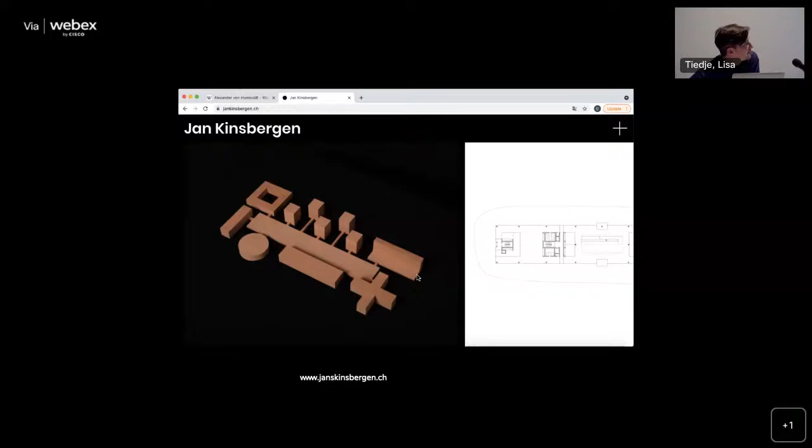It's for a bigger project from Jan Kinsbergen. He won the competition for a campus. These are all buildings within the middle of a big park, and we proposed within that big park for the competition to do an intervention.

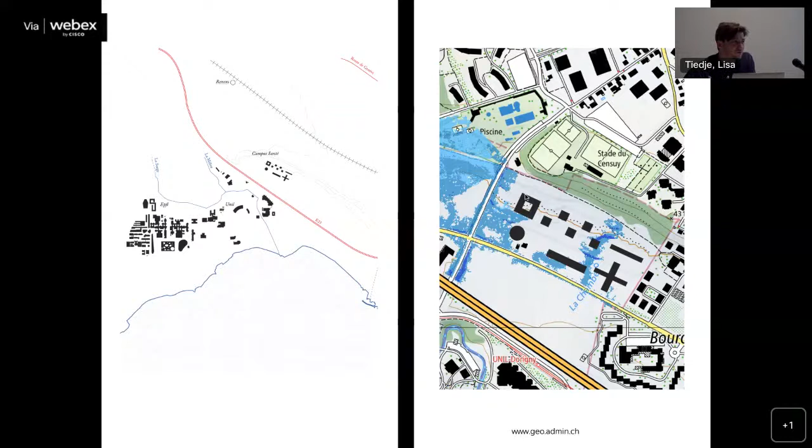When we looked at the site quite fast, it was clear that there was already a lot on the site, although it looks very empty. There was a big problem with water maintenance and rainwater, and what to do with the water in the park, which would only become more difficult once it's constructed and there's more hard surface. At the same time, there was a very strong height difference through the whole site. The pink is the lower part, the green is the upper part, and there's a very strong separation between the two.

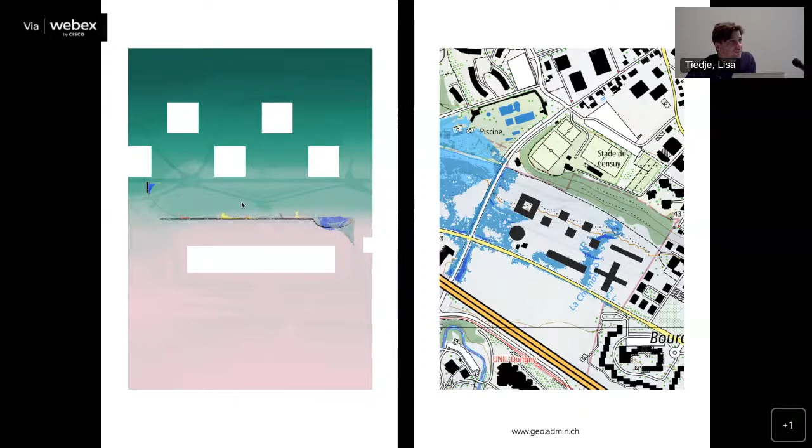So we started to think, can we somehow make a fountain within that park, a place where people can come together, and at the same time create another type of nature on that site. Together with Fabian, he brought this reference of Cranach, the Fountain of Youth, with this idea of how, in a mythical way, water always brought life and also death at the same time—it's dangerous, it brings life, it's necessary, it can be too much—and how this can at the same time become a center around which people can come together.

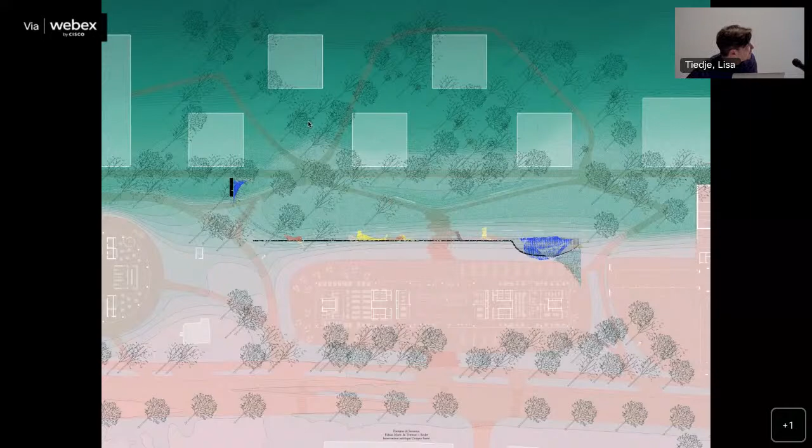Here you see the full plan of the campus. You have the three buildings of Jan Kinsbergen, and on the top, housing that will be built.

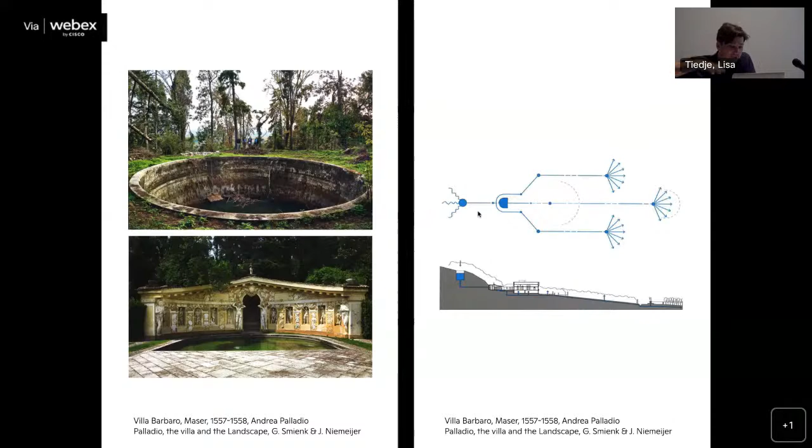When we started to look into the project deeper, we got fascinated with fountains of the Renaissance and other older fountains that look quite aesthetic and classical, and at the same time are integral water systems that recuperate water on the top of the mountain. Here you see Villa Barbaro from Palladio with the big reservoir on top, and then through just gravity the whole thing sinks down and brings water to the fields down, going through the grottos, etc.

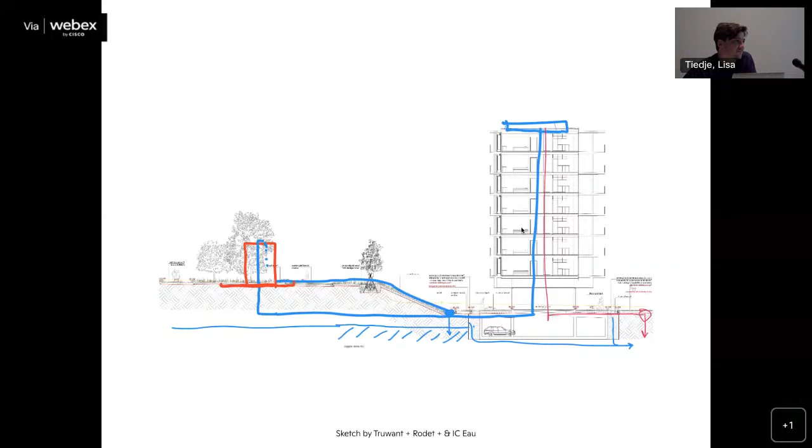So we were thinking, can we do the same today still? Can we link the buildings and the rainwater collected on top of them for our fountain, and create a fountain that is just powered by rainwater? At the same time, how can we create, through the setting of different conditions, different qualities of nature?

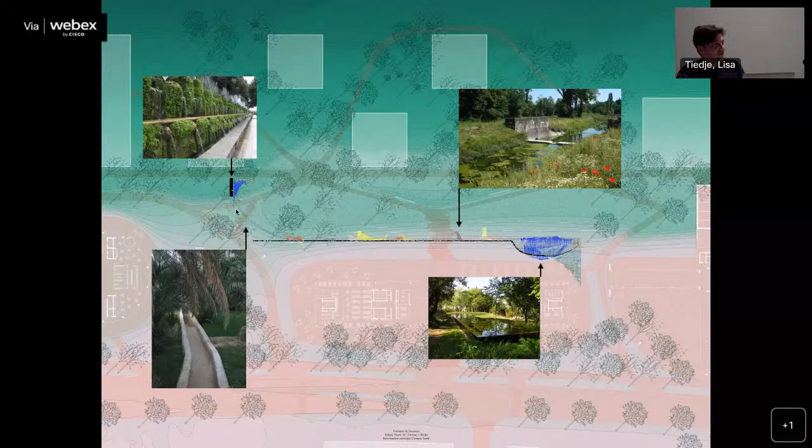For example, in the beginning, water from our reservoir will go really slowly on a very rough concrete surface, so it will start forming mosses. Then it will go faster, like a little channel on a very smooth surface, and nothing will grow there—more of a river situation. Just by deciding the speed of the water and the texture of the concrete or material it moves through, we can create a fountain through which water will infiltrate the soil over a longer period, while creating a new nature on site.

It's not so clear here on the screen, but it's a 120-meter long fountain over which this whole system develops from a really big reservoir on top. There will be a massive reservoir to start with, and then two underground reservoirs to keep the fountain charged with water even on hot days.

To bring that down further to a second project—this kind of uncertainty of how to work with and plan for the future, while trying to read what's already on site. We were selected for the Basel Pavilion competition in Basel for the Architecture Week, where there was a site in Dreispitz, a very industrial area that's going to be developed soon. On the rail tracks, we were asked to work with a catalog of reused materials to build a pavilion out of reused materials.

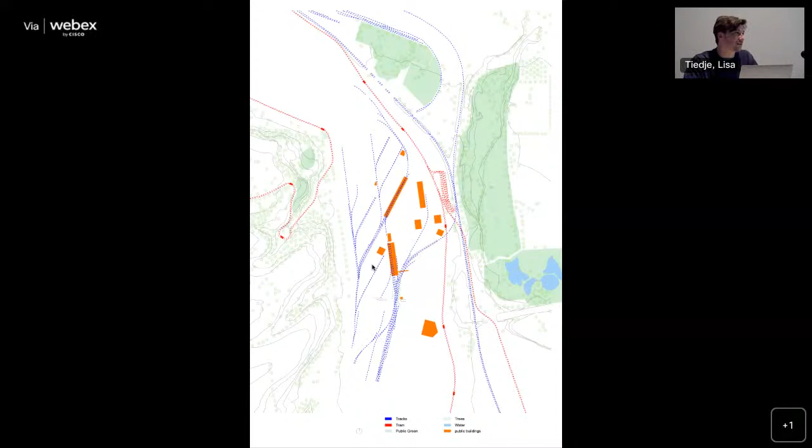This is the situation of Dreispitz. It's like a plateau between Bruderholz, which is a hilly green situation, and the park on the right side. It's a very dry plateau, almost fully covered with asphalt and stone.

And we got this catalog to work with, of all materials, very well prepared by Circular. Every material was measured, how big it was, with a 3D model for it. And then we had to come up with something.

So we started to work with this site, basically seeing what is already on site. You have this beautiful garage building, with VMM engineers on the top, and a little house on the bottom still standing there from the signal house.

And then we started to look at the site in itself, what is still there - these trusses from the rail tracks on which the cables were hung. We also have cables. So we actually expanded our catalog with the site itself and everything we found on it.

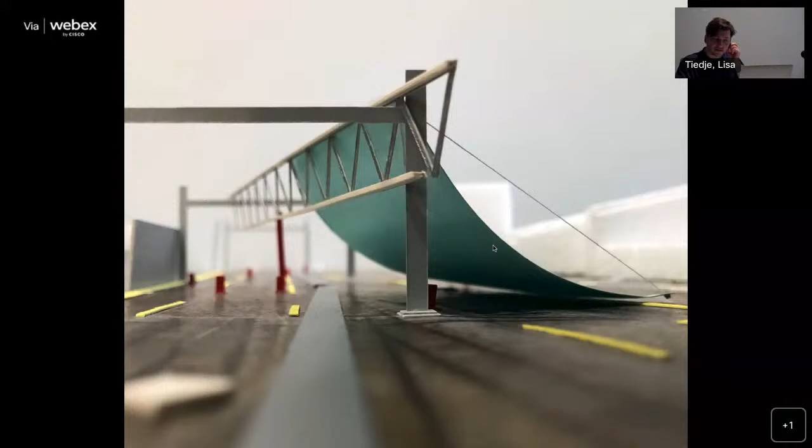And we created a beam that's somehow way too big for its use. At the same time, it can actually deal with the scale of this ginormous site. Against it, we posed the vaults of the parking garage in the same way, with folded metal plates, almost like a flown-away roof against the beam, creating a place of shade on the site.

So we started with making something that is not really related to any program, but that can absorb quite a lot in itself. So you have the roof, the beam, a platform that can roll, a wall on the bottom, and some steps. So it became this whole collection, almost on-site, that became more like an urbanism on-site than the object of the pavilion in itself.

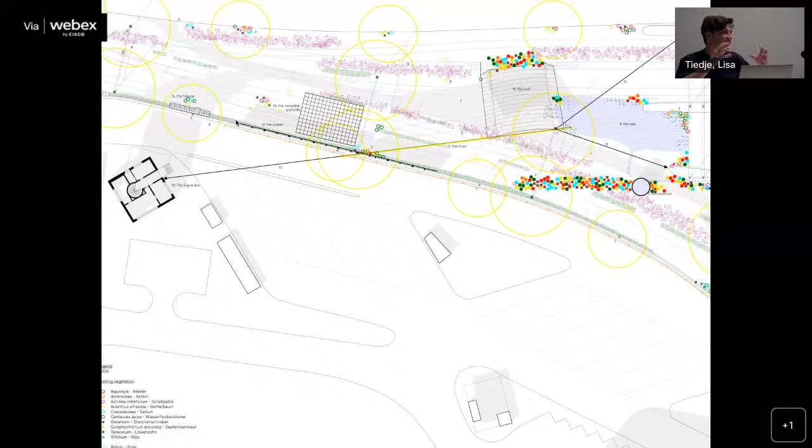To develop it was quite interesting. We did this together with Neven Kostic, the engineer, because we started to work with these metal beams and putting them together, and it's quite fast. We realized you're not making a normal beam - that's not how a normal beam is made, because the joints can't be made in the same way.

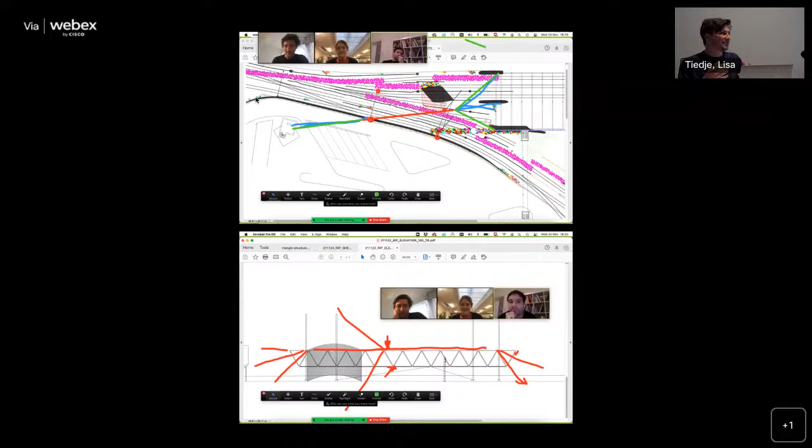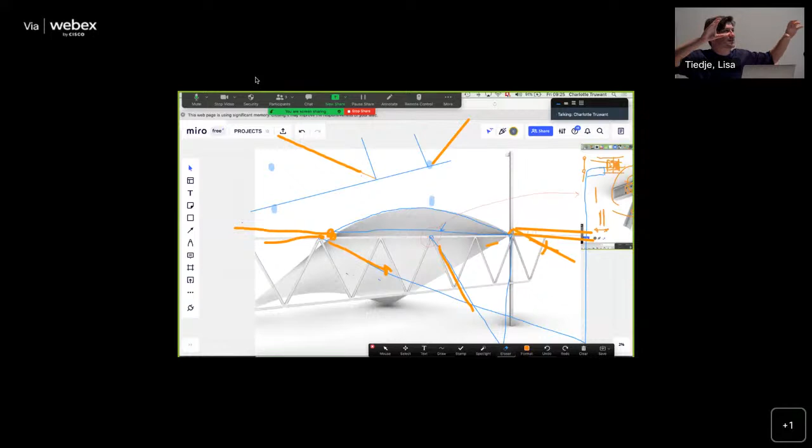It's found material - it has a certain way it is. So our big beam didn't work at all, until Neven started saying it works if you just put it on tension. So the whole beam got flipped up in its functioning, and it was actually pulled on both sides, which suddenly made it work not on pressure like normally, but the other way around.

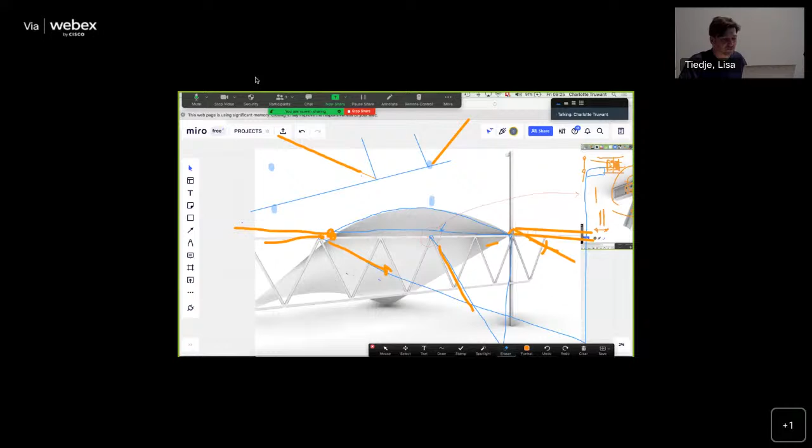We found it very fascinating that just by working with found materials, your whole logic changes - we could never have drawn this beam this way if we had worked with more standard materials. Here you start to see how these beams come together with small plates to hold them together, and these joints need to be put under tension rather than pressure.

But what maybe was even more important on site is we started to map everything already there in terms of plants. If you look very closely, you start to see there's actually a lot growing in just a few years. We thought, okay, can we just acknowledge this, and can we create conditions for it to happen even more often.

So the whole idea was to use something not from the catalog, but we had the possibility to add some pieces - to use an old grain silo as a big reservoir of water that would recuperate the water leaking from the parking garage, and would suddenly create a fast-growing nature.

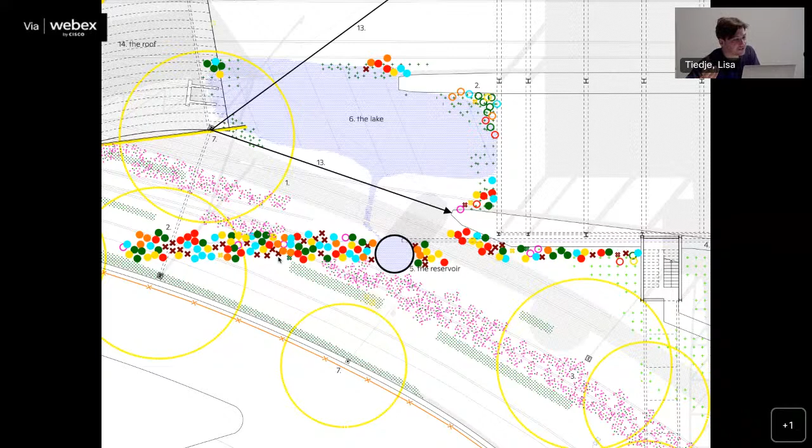So you would have the pink dots, which are cosmos flowers, these high pink flowers that grow really fast, combined with a series of found plants that were already there which we would reinforce, and other ones we would mix in, creating a park with the existing conditions of today.

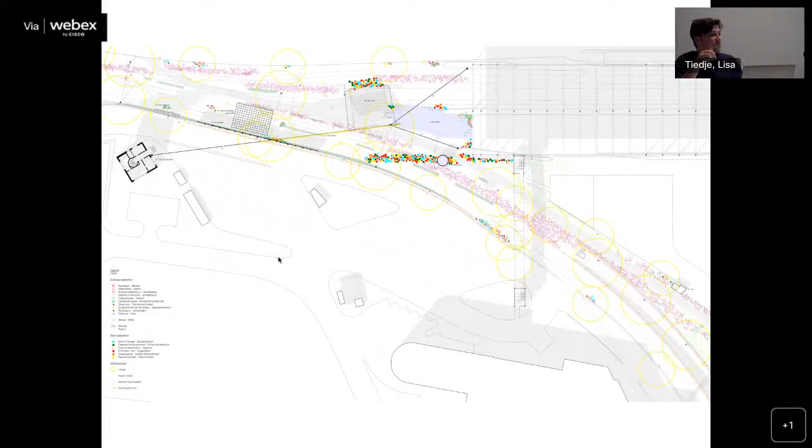For a project that could hopefully also stay, because normally the pavilion was only meant to be seen for 6 months, and it was our hope that this park would somehow be the start of the new development after. By coincidence, Grafton won the competition for the whole master plan, and they decided to keep everything on site and turn it into a park.

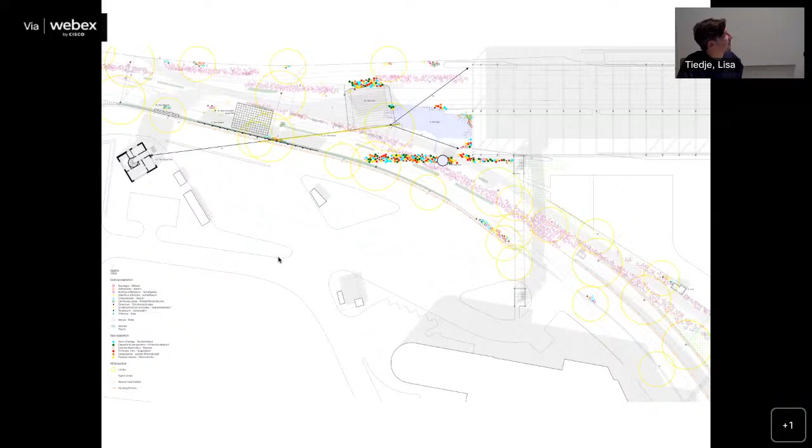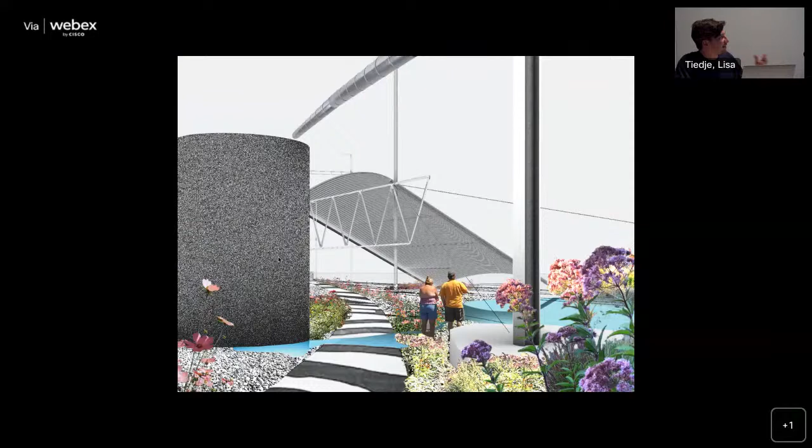So somehow there was a logic in it that got also acknowledged by Grafton - they saw the value of the site. So you would have a whole set of different possibilities on site under these big structures, and at the end, over these 6 months, a park that would have grown to the last days.

A lighthouse competition, maybe less uncertain, but definitely conditions, because it has to stay, it has to hang. It's in Geneva for a yacht club.

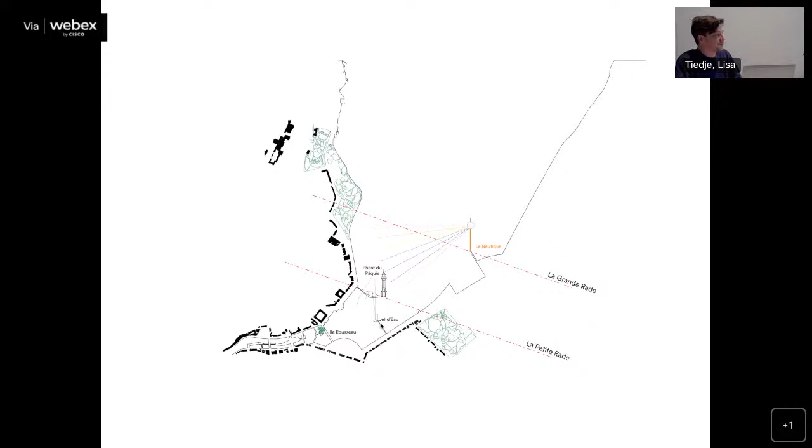I don't know if anybody knows Lac Léman a bit, but what is quite fascinating is you have the big fountain, the Jet d'Eau. It was actually originally for a hydraulic plant, to let the pressure off. They opened the valve and it would shoot up, which became the symbol of Geneva, but that was never intended. There's also a little lighthouse out of metal, very fragile but very strong, standing there, and on the other side, the baths, Les Bains des Pâquis, on the Lake of Geneva.

I don't know how familiar people are with sailing on the Lake of Geneva, but it's quite an important sailing course, and there are a lot of different winds that function on the lake. Geneva is really at the tip here, and the orange one is the one we were designing, which becomes one of the furthest points you can somehow get onto the water.

It was all in the context of the Bol d'Or, one of the big sailing competitions in Geneva. They wanted a new start cabin where you could sit, see the starting line, and judge the whole competition, which happens just a few days a year. It's very little, but they wanted to build the whole construction for that, together with the lighthouse.

The harbor is linked to Alinghi, one of the big sailing companies, which works with extremely high-tech material. The boats don't even touch water anymore today, they just fly over it. For one of their races, they even flew it over the Alps. It's quite a magnificent sight.

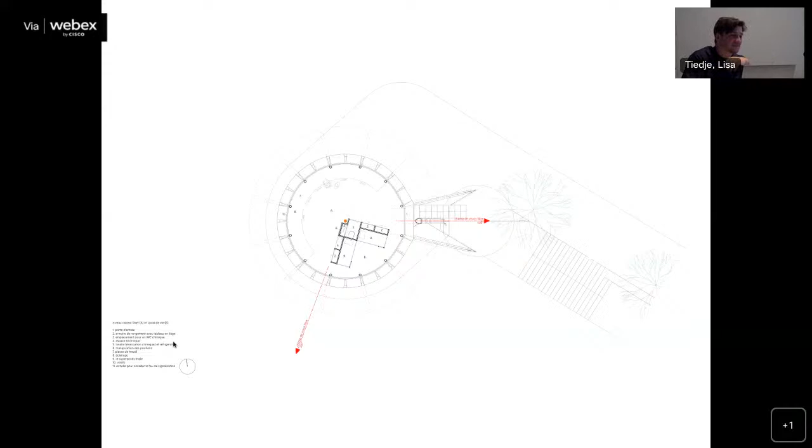So we started with a little, very compact, one-floor cylinder building which could contain everything for the race. You would have the table to watch the water, and at the same time toilets, beds, everything they need for these few days a year.

But we found it interesting to actually suspend it, to not take up that spot underneath, and to leave this space where you could get so far onto the water completely free. We just put the box at the right height it needed to be for the right viewing angle, and suspended the whole box from the pier.

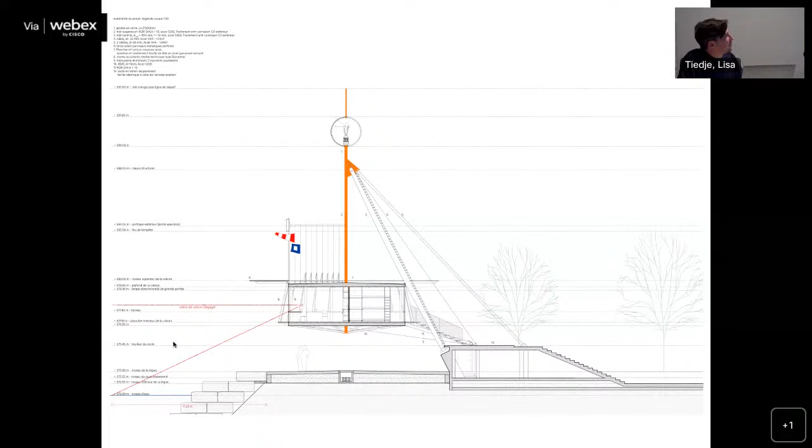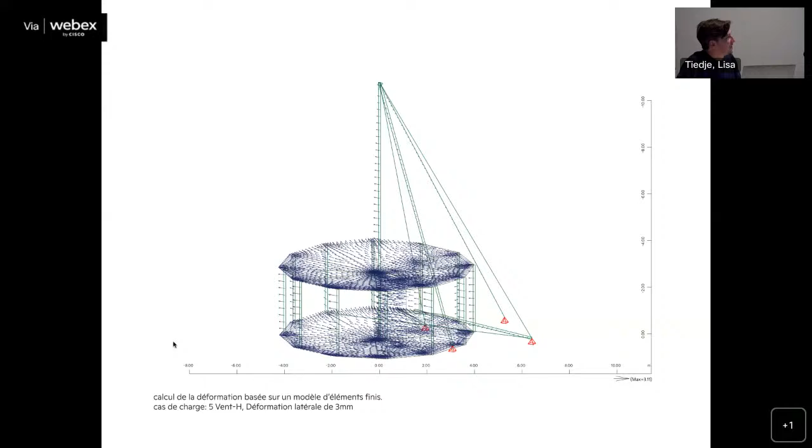Our engineers, of course, calculated everything, so there was not the smallest deformation, because this is quite tricky. This thing flies away, it's really like a sailing boat, almost, that you have to start thinking about. Even the cupboards inside were structural, because everything needed to be structural to make it one solid box.

At the end, you get this little object that almost defies gravity, but is actually quite solid, hanging above this empty spot where you could get really far into the lake and look back to Geneva. On top, you have the light, like you see here, and the flags and everything that comes with sailing.

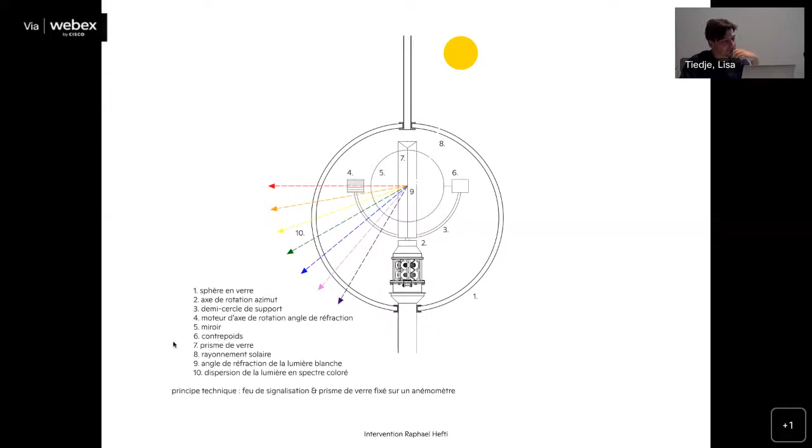We worked together with Raphael Hefti on the competition, and he designed an extra lamp for the whole piece, for the tower. So you have the lamp at the bottom, and he proposed a prism with a certain rotation system that the light would fall on, so the light falling onto the lighthouse would break and create a prism effect onto the rest of Geneva.

So even at daytime, you would see at certain spots the lighthouse appear as a color, a color that constantly changed, that you can somehow not grasp. Just like the Jet d'Eau is there as this kind of ephemeral monument, it creates another point on the lake in this manner.

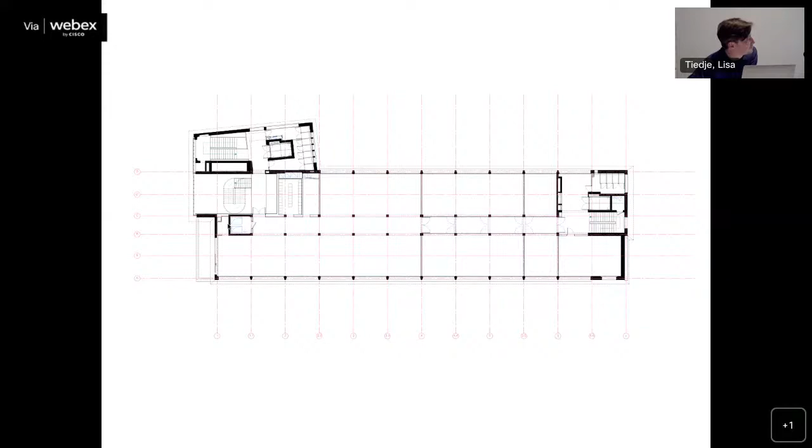The building itself, because it was a factory, had a very rational structure. So you just have columns in the middle, a corridor, with then on two sides the classrooms.

For the extension, we were thinking, okay, how can we actually, instead of repeating another time the same floor like they already have four under it, propose something that's very different, the opposite? So suddenly the corridor is completely on the outside. It starts to work almost like a threshold to the outside, and all the ateliers are joined in the middle.

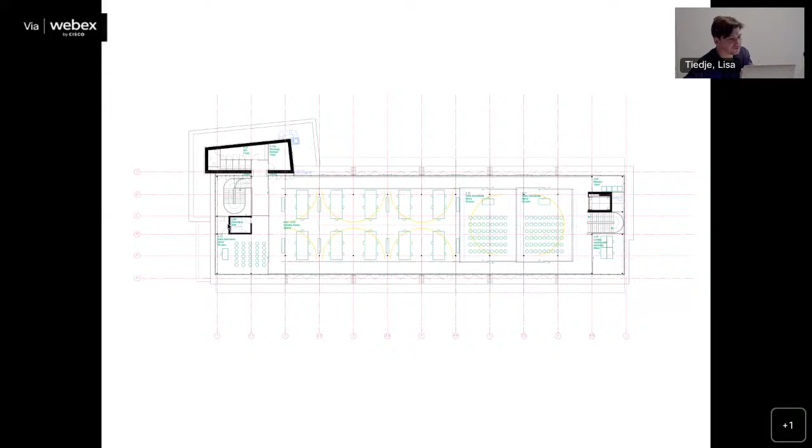And how can we make this space into an extremely flexible space? It can be a big space, it can be a small space, it can be whatever they need. If they want to do a fashion show there, they do a fashion show. If they want to do small classrooms, they do small classrooms. So we decided to make a roof.

Like today, when you're standing on the roof, it's very nice. You're in this kind of horizontal landscape, very beautiful. So everything we actually add is in a roof above your head, of techniques, of structure, even walls that can come down, doors that slide. Everything is linked to this roof situation.

The structure here you see, so there's the facade here and the columns on the inside. Together with Schnetzer Puskas, our engineer on this, the same as the lighthouse.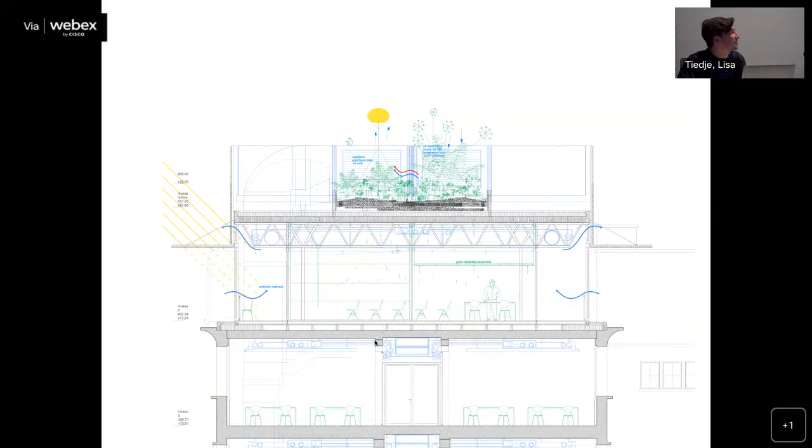The structure actually comes in the middle and lies on little beams, and in this way the weight is evenly distributed on this system, because it was quite tricky to add on this existing building another layer, like you see here.

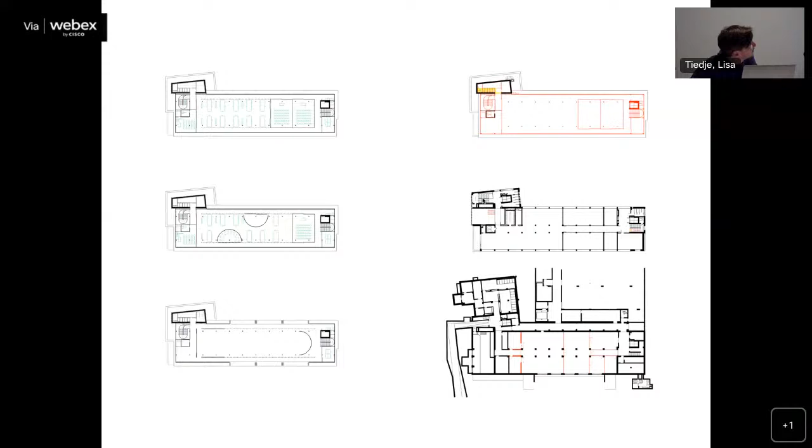So at the end, it became this kind of very horizontal slab of classrooms that can just be used through curtains, garage doors, different systems. It can be separated into different spaces. Like you see here, the doors that can just lift and make it into one big space.

Everything became really about somehow the space between the classroom itself and the outside space that can be closed off. They become a corridor, a threshold to the outside, and can even easily control the climate of this box on the roof, this glass box that still stays protected from the sun.

This is quite directly continued in a project we did for Schnetzer Puskas, the engineers, an extension of their office spaces on the ground floor in a building in Basel that was built in '65, and actually renovated in 2013.

The space I'm talking about on the ground floor used to be a John Valentine fitness club. Quite a magnificent space where the columns became Roman columns, and there were frescoes painted on the wall. It was really a 60s kind of idea of fitness, it was a swimming pool inside. It was quite a known place in Basel.

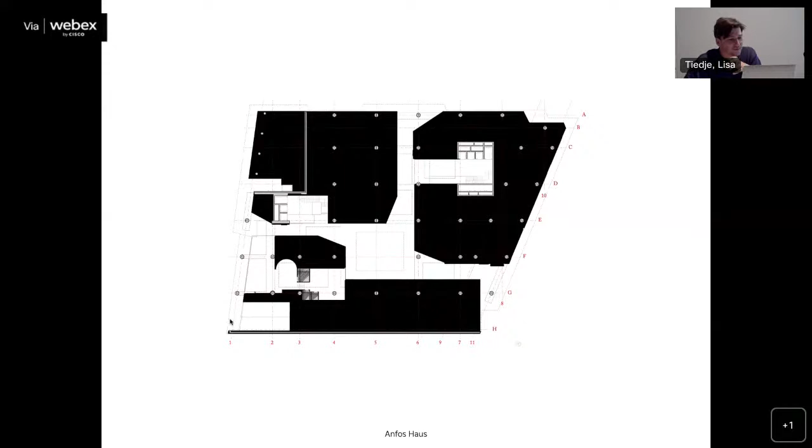But what was left of it today, because the stairs were closed and the underground was rented out, is just this space here, which is the space they took. A very bizarre space, kind of carved out of the building, almost like a leftover space.

But we accepted it as it is and said, okay, let's just work with the space like it is today. And let's see how can we do actually not too much to it, but just the barely necessary.

The floor is not really pretty. Nothing is really pretty in the space. It's quite a difficult space. But it has a huge potential.

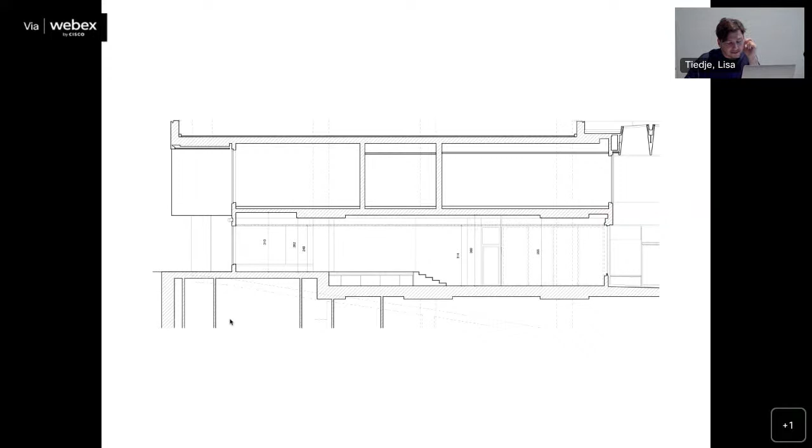There's still more than half a meter of fake ceiling. We had to anyway rip out the ventilation system because it was not functioning. So we had to adapt. Normally we should have taken everything out and thrown it all away and replaced it fully new.

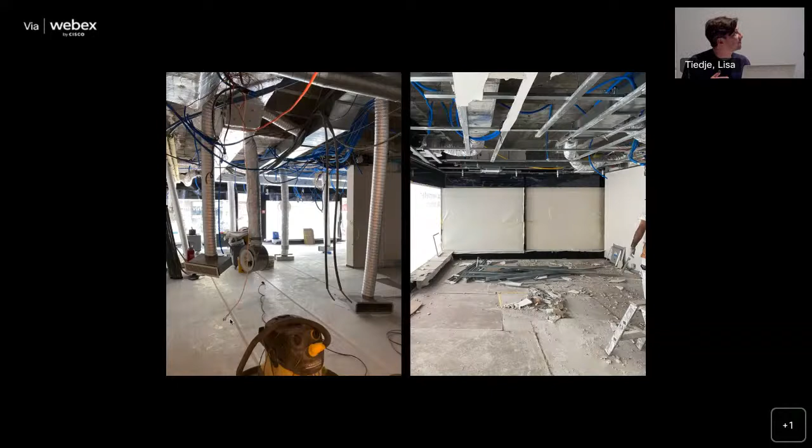We convinced the clients quite easily to keep the existing ventilation and just put it up to date. So it's not functioning 100% like office space put to the norm today, but it's more than enough. Office spaces are just over ventilated today. And they said, okay, we do what we think is necessary so we can actually keep everything that's in there and we don't have to rip it all out. So it became really, again, a question of ceiling this whole project.

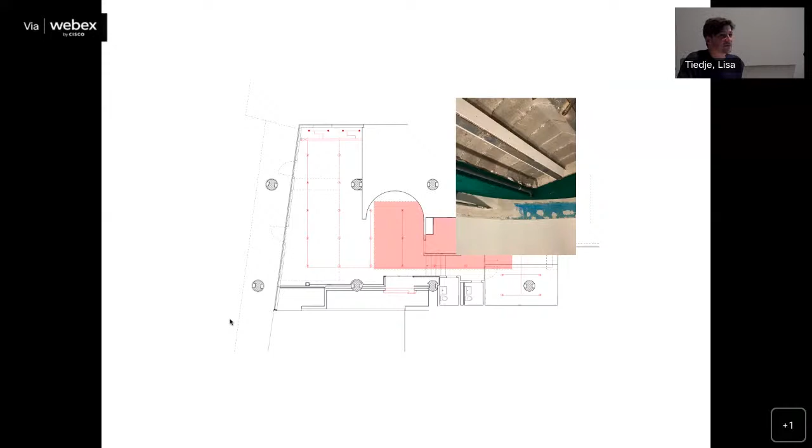It was about techniques and ceiling, replacing ventilation, adding sprinklers to it. There was a problem with fire security, closing off the beams that got exposed. It was about electro cables because there were cables everywhere falling out of the ceiling. So it was just about dealing with what we had and organizing this ceiling into this kind of complex whole.

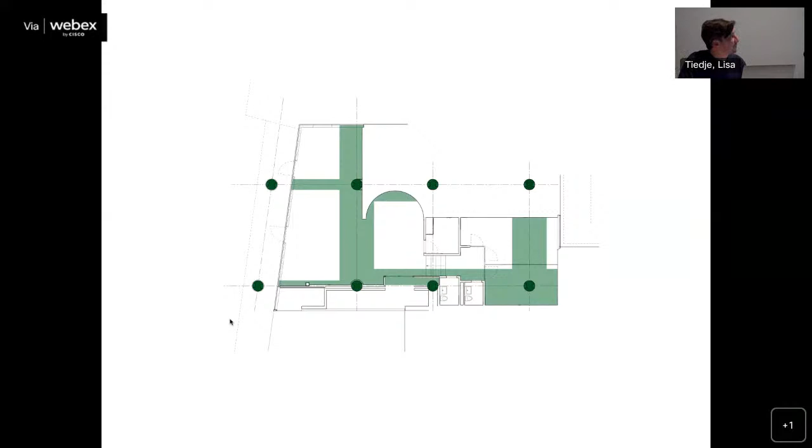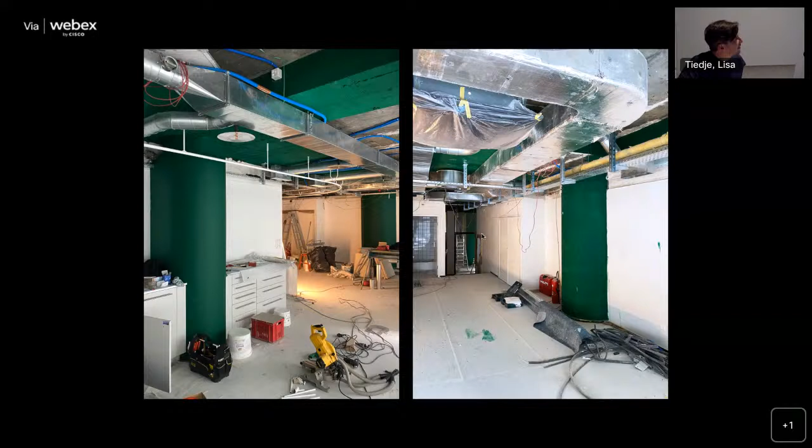The only thing we actually did was paint the whole structure that was now visible in green. Suddenly you started to read a certain structure in space. It was almost like you feel much more that you're in a bigger structure in which walls are placed and somehow this space is carved out. Even this column in the back space, which is standing in the middle of a room for no reason, makes more sense today.

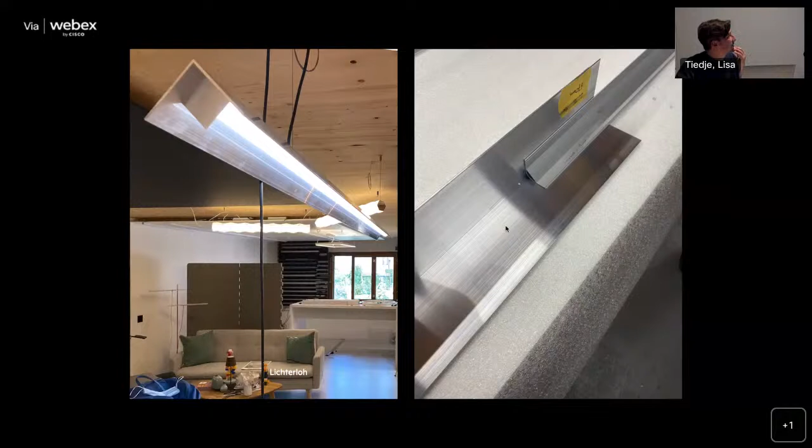We added to all of this a new layer of lights, almost like a new ceiling under all the techniques, which can be put on or off in different fields, giving again flexibility. We designed ourselves a light together with Lichterloh in Basel, which is also the most simple light you can make, out of an aluminium profile with an LED tube in there.

But this gave us the possibility to make a very continuous ceiling over the whole place and create this new horizon. We also decided that everything above this horizon, we don't paint, we leave as it is. Like here you still see the blue of the frescoes from before, of John Valentine's club, and they somehow become part of this ceiling.

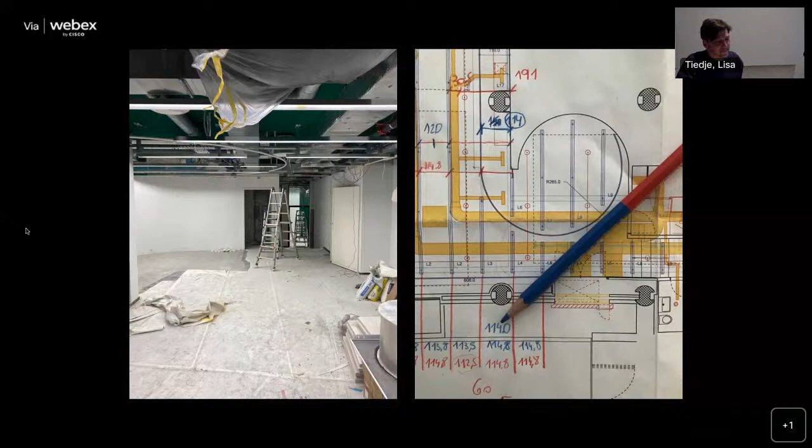The only other thing we added, which was very important for the space itself, is a curtain. Together with Chevalier Masson, we did this. It's one big curtain rail that gives us the possibility to organize the spaces in a lot of different ways through two different types of curtains. One that is shiny on top, the other shiny on the bottom, because again, it's quite a deep space, quite a dark space.

The shiny side reflects the lights or the outside light inside the space. At the same time, they can black out the space completely, because they're dark blue on the other side. You see the old frescoes coming through.

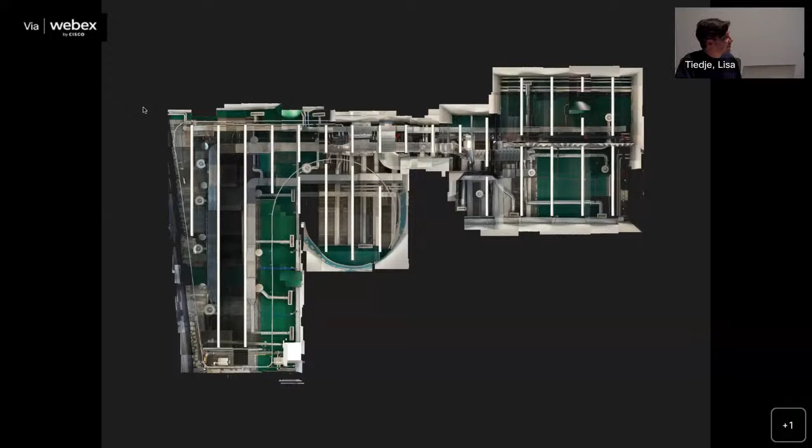So basically this image became this ceiling, this almost technical organization of functions, became for us the project in itself. Everything else that came with it, like there used to be a staircase down to the floor downstairs, we just filled it up, like, okay, we don't care. It's not the topic. We put all the attention to the ceiling, so this underlayer loses importance and can be dealt with in a very direct way.

The only thing we added to the whole thing is furniture. We reused the kitchen from a friend's project that we just repurposed inside the space, which was a little bit more complex than we anticipated.

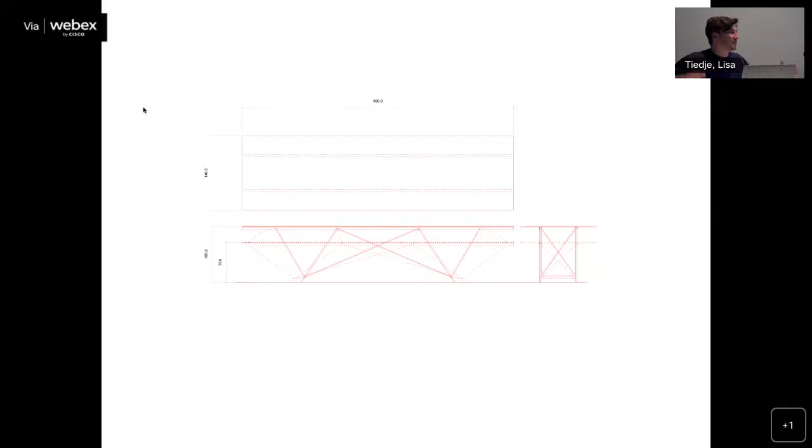We made tables that again deal with flexibility within that space. It's a table, 5 meters by 1 meter 40, that can easily be put up to a high table or a low table, creating the possibility to have a standing situation, sitting situation, presentation situation, all as light as possible, so you can easily move it around, because you can make very flexible spaces, but if you cannot move anything around, nothing is flexible.

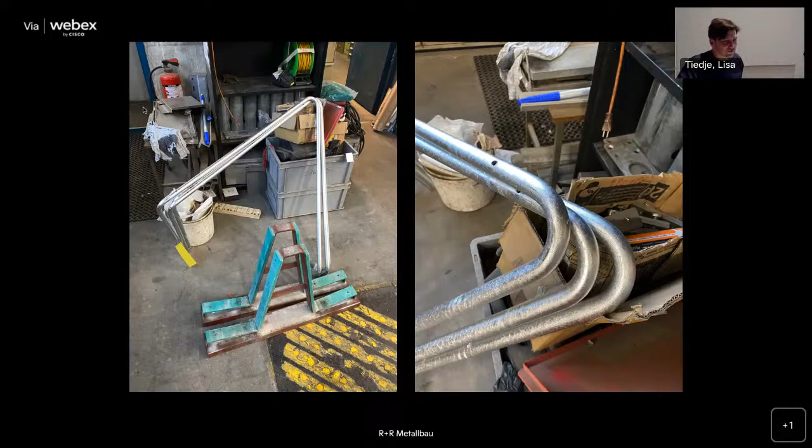And a small round table to it, again, in a very easy way to demount and mount. So at the end, it's this quite graphical plan that becomes a whole series of spaces that can be organized just with the curtains, where you can hide the kitchen, show the kitchen, project, make it dark, make it white. So the space is not anymore kind of a clear space, but it becomes much more an environment in itself, where you can control those conditions around them.

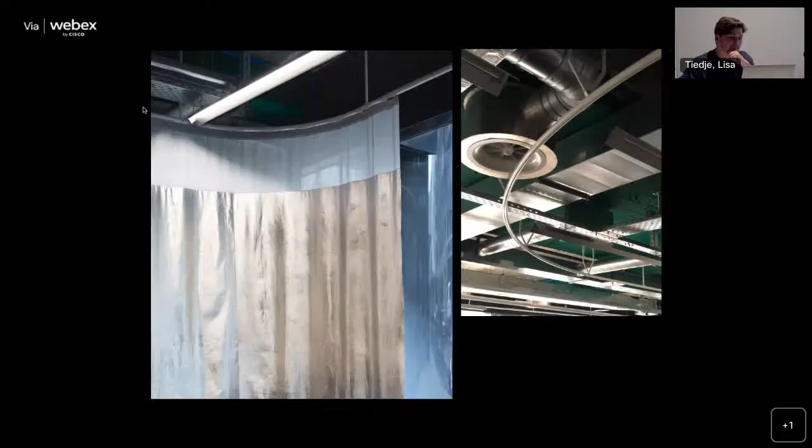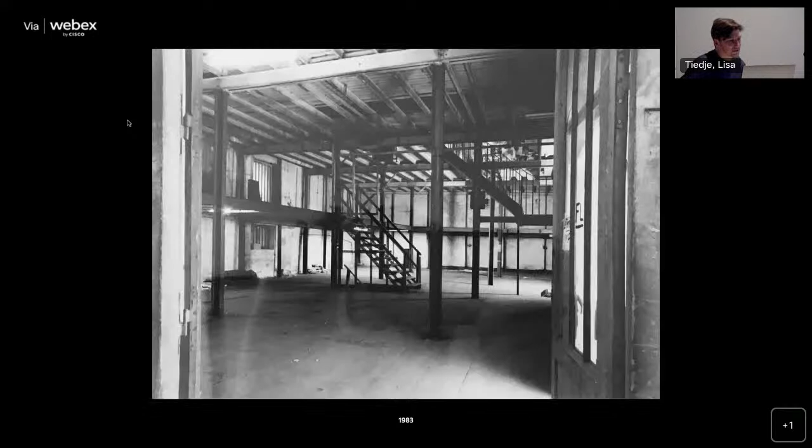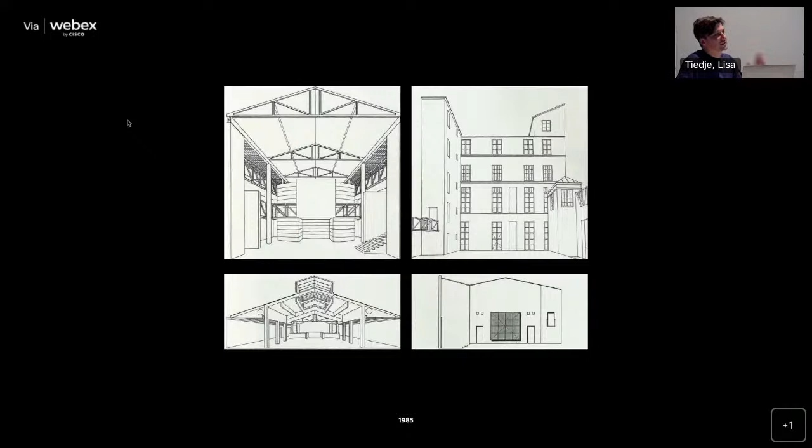They got renovated in 85 to a kind of very postmodern idea of architecture, everything very symmetrical, although the building itself is not at all symmetrical. It's quite forced on top of it.

It opened the center in 85, and at that time there was the entry, and still today you have the entry actually from a small street on the side to get into the centre. It's really hidden. This is the street entry, and then you have the door there.

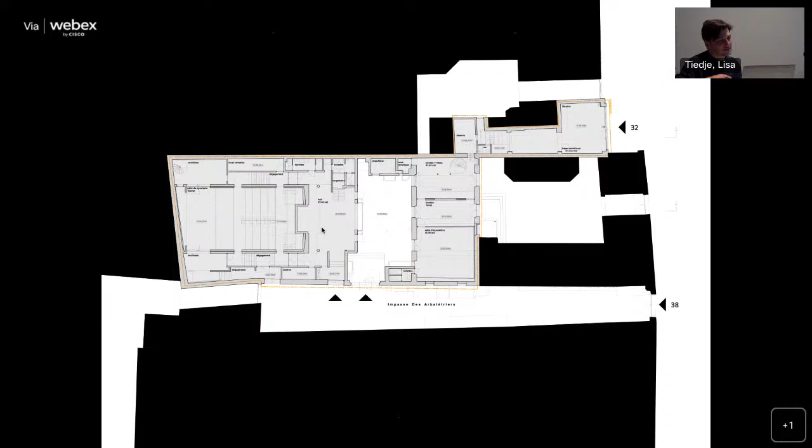Here you see a full plan of the 3 different buildings, and kind of the very complex world it is. So it's a shop, it's offices, it's 2 exhibition spaces, and it's a small theater space, like you see in the back, all in this very dense Parisian situation.

We decided quite fast together—this is a project we do together with ASBR from Paris, who actually live very close to the center and know it really well. We decided quite fast, let's not do too much to it, because the volume itself we could not change anything. You cannot go up, you cannot go down, not left, right, everything's protected. And the main questions posed to us are about acoustics, ventilation, and handicap accessibility. It's all about norms that it needs to reach, which it doesn't today.

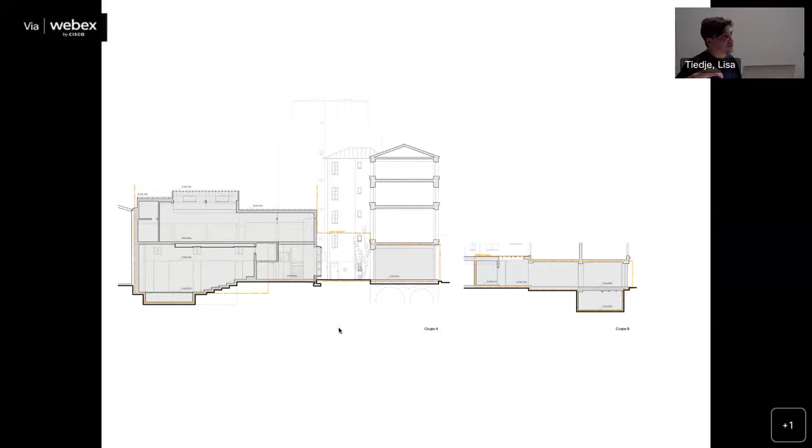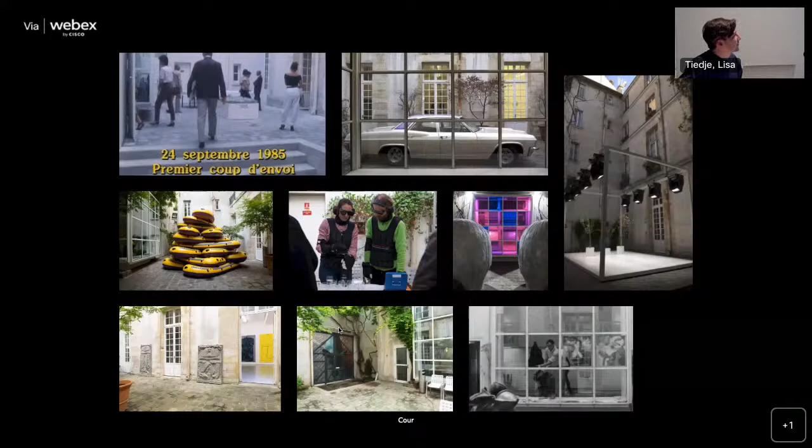But when we looked at the center and its history, we saw how artists, over the now 40 years, used the center how they wanted. They used the courtyard for exhibitions. They used the salle de spectacle, the theater room, for exhibitions, but also for performances. The same for the exhibition room. Somehow there was not a clear function for artists—as soon as there was just space, there's no clear function to anything. So in our own proposal, what we did was just work on the thresholds, to not drastically change the full organization, but only the borders in between.

So one of the big moves we do is to change the entry to the bookshop. So you enter now from here, and it becomes an entry situation where they also sell books, where you come then into a small exhibition space. Oh, sorry, it was too fast.

Then you have the courtyard, and then you have a foyer, and then you have the theater space in the back. And on the first floor, you have the exhibition space. We just make it so that all the walls in between can be taken away or put down. So that makes it that suddenly the foyer and the theater space together can become one space, can become an exhibition space. The seats can be moved, can be changed how we want.

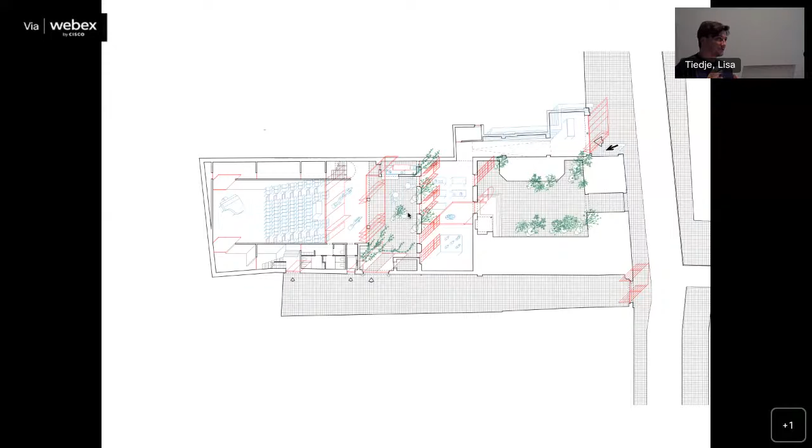And the same for the courtyard—this can become almost an outside space from the courtyard on. And in this way, instead of adding square meters, which we could not do to the whole project, we just decided to make it almost like a hyper-technical machine where you can say, today this is theater space, today that is—they can have theater upstairs, exhibition downstairs. It suddenly all functions and becomes much more flexible in its usage without having to add anything to it.

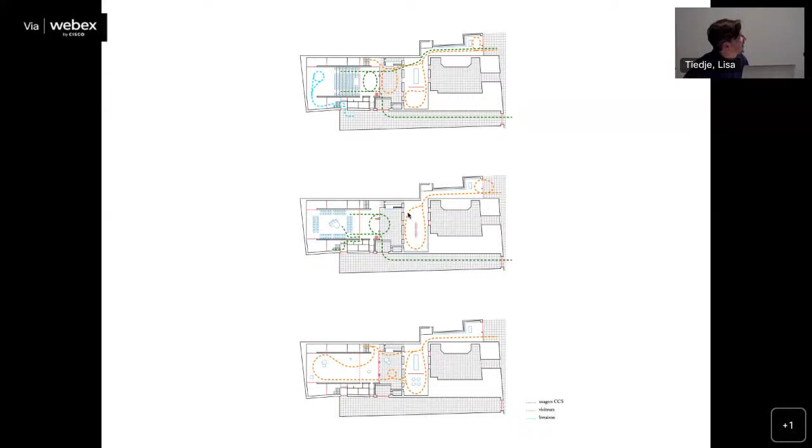So here you have again this sequence that doesn't change drastically, but it's about all these layers in between, with the possibility of changing everything. And now on the 9th of September is going to be the first stone laying, and we managed to realize it like that, so we're very happy about that. But what I showed now is the competition entry, so it already evolved quite a lot since then.

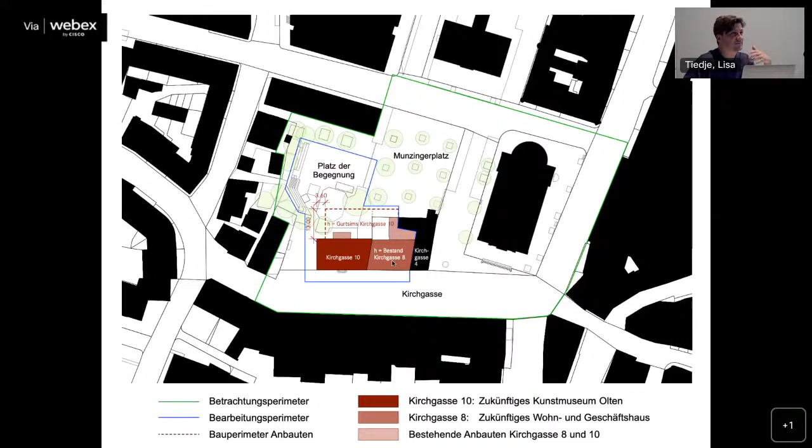When we were looking at the building, we quite fast realized that the qualities of today will be very difficult to keep in the future. When we built in the back of the old schoolhouse, this protected building, half of a museum, we can never open the facade.

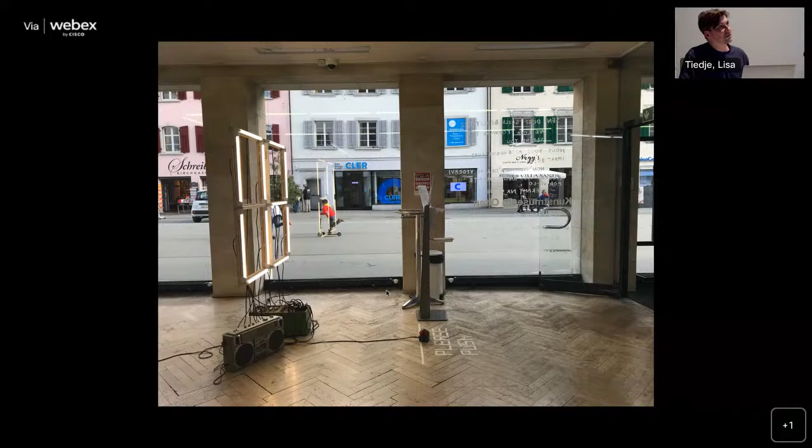We're not allowed to do that, which today is one of its main qualities, in a small town, Olten, where it's not always easy to get everybody inside. They have a full open vitrine to the street side, and everybody can see in and walk in. They would lose that in the future because they had to move to the building next door.

On top of that, in the back of the other building of the old schoolhouse, there are some beautiful trees that are more than 100 years old. Today the climate is still such that you can chop them down, but already in Basel, that's not possible anymore. So we said, okay, let's just keep them, because they're as valuable as the building itself. So maybe we should not build in the back.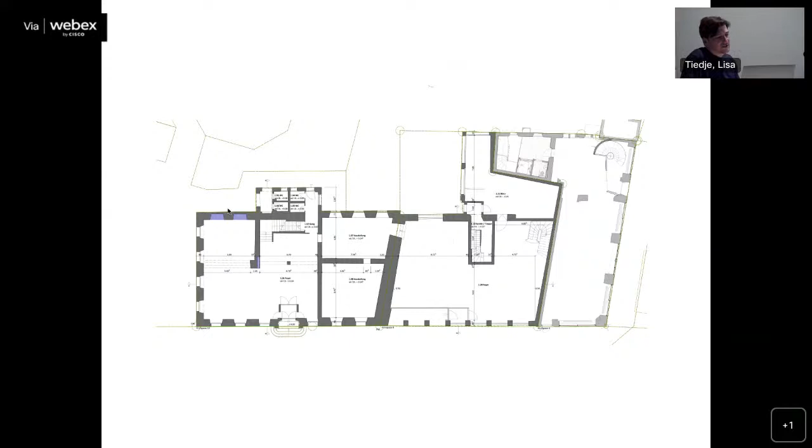So we started to look at the existing buildings themselves and discovered in the basement of this one, the one that was going to be taken down and turned into apartments, that it used to be two buildings. This is one basement and this is a second basement that over time got renovated into one building, with a very similar size to the old schoolhouse, but less value in the eyes of the historical department.

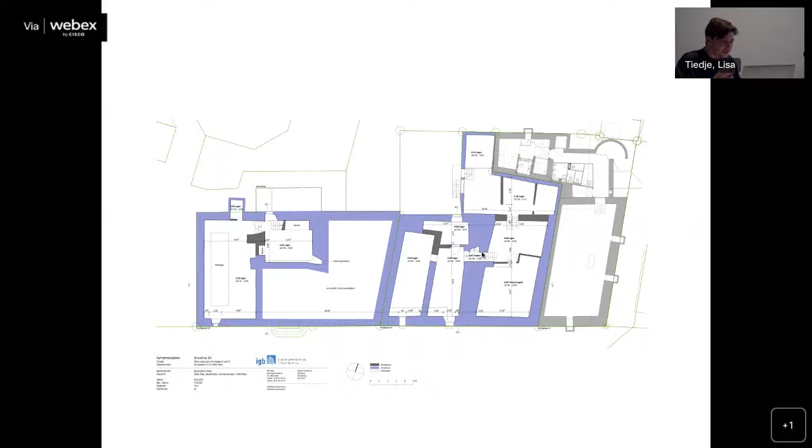So what we proposed was: okay, we're going to re-question the program. Maybe we can make less. Maybe we don't need all the housing that needs to be built, and maybe we can make a hyper-efficient building that's quite cheap and easy to build, and that doesn't need to be financed by something that has to be built first to bring money to build this project. So maybe we can make it all much easier and give it at the same time a facade, leaving the old building in its glory as it is.

It's almost like a backpack we built onto the old building, the schoolhouse. We can put all techniques, everything we need, into the new one, and just plug it straight into the old one.

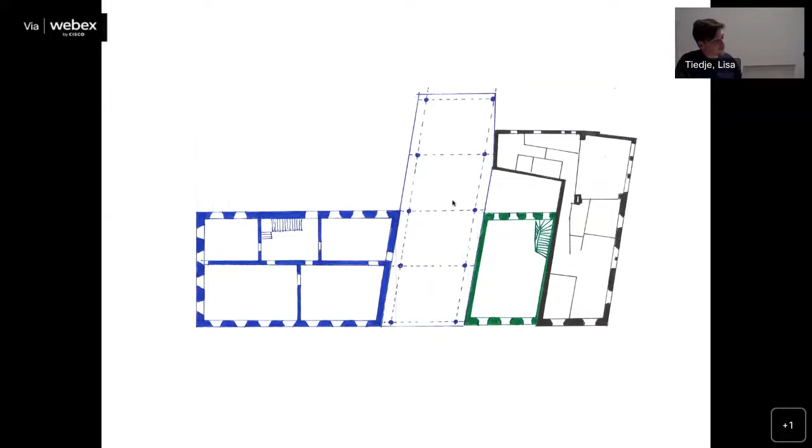Which gives this plan, where suddenly you start to feel again the older rhythm of houses, with a very similar size next to the old schoolhouse, which was an exceptional building with a bigger scale. We would somehow flip the building, turn the museum around. Today the museum is here, and then it would be in that direction, forming a corner towards the little square in the back, creating the square, keeping the trees, and having visibility on two sides for the ground floor of the museum.

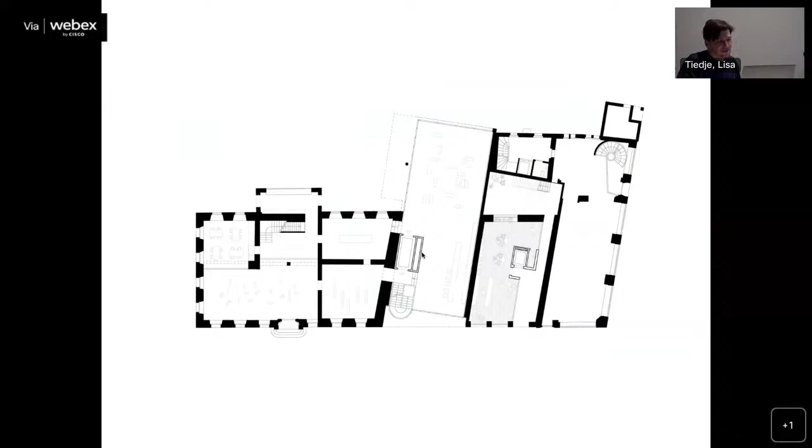On top of that, this is kind of the new core for the old building, and at the same time we can organize the techniques there, creating much more presence towards this backside with the corner.

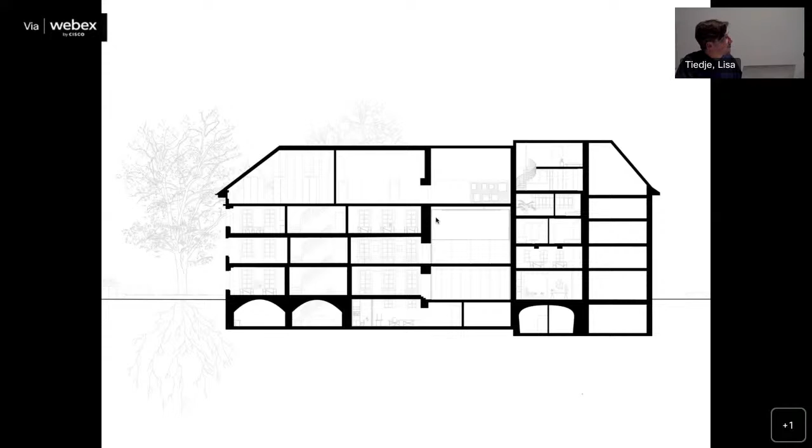This is then the front side, and here you start to see what we did with the facades on top. This is the old museum, the old schoolhouse, which becomes the smaller rooms of the museum. In the new space, we add a really big space that's much higher and has a whole other dimension than the other spaces, and can do something the other spaces cannot — a hyper flexible space, suddenly much higher than they actually had initially in mind.

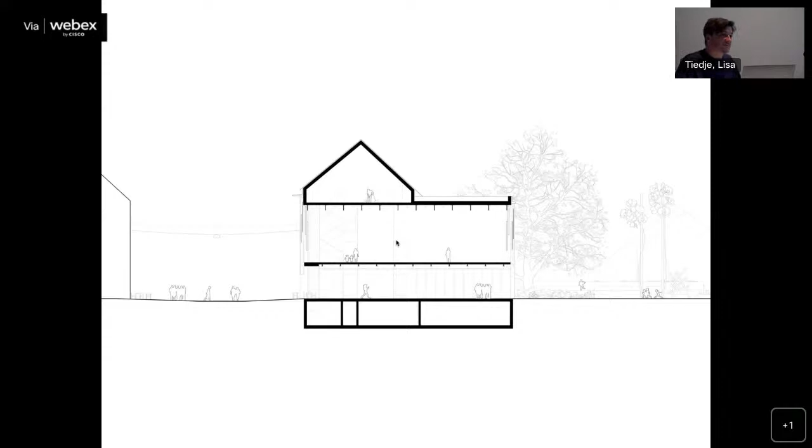What is important here are the facades. So actually thinking about these smaller museums and how they don't have to build a lot of walls, a lot of infrastructure every time they do a new exhibition. It's just about controlling daylight, light conditions within the space, structurally. So what you see here in front are our shutters for sunlight.

So you can actually cut off sunlight to the inside, but still have a kind of more diffused light. And on the inside, we have another type of panel, which can basically close off the box completely, creating a fully flexible space on two sides that can be completely connected to the city or completely disconnected from it and isolated in itself.

To finish with a very short part on a project that we're doing now, but that maybe links back to the beginning.

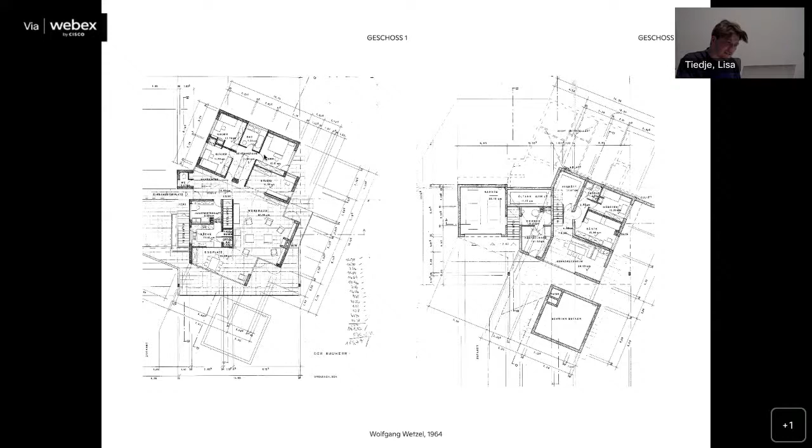Which is an extension of an existing house built by Wolfgang Wetzel, not far from Basel. A very beautiful house with 3 meters on the ceilings, 2 floors that are inside the slope, with a nice swimming pool. You see here, this is the living space, and then here's the kitchen, and then in the back you have the bedrooms, and then there's a little studio downstairs.

You can see the situation. So it's almost like everything on one floor and then an extra studio downstairs. Turned a bit, very nice view. There's a swimming pool in front. We glued another one on top because it gave us an LA feeling there.

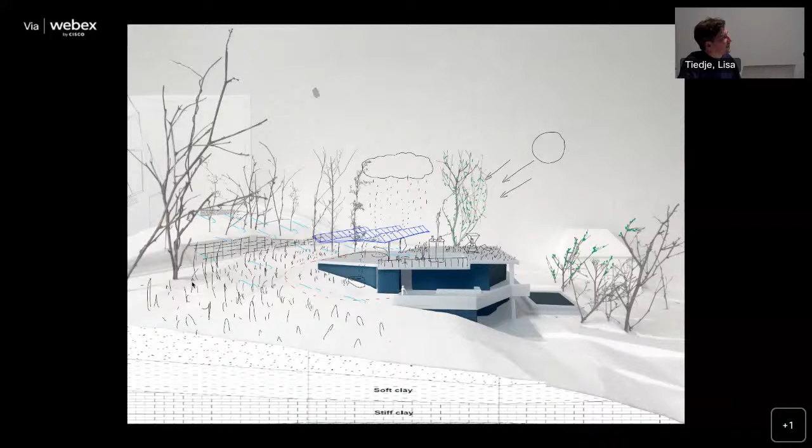And we just were wondering, okay, what can we still add to that house? They wanted to have an extra floor to it. Also with the idea that during Corona, suddenly there's office space missing for them to work. And maybe in the future, maybe they want to move upstairs and maybe the parents move in, or maybe not. How can we continue living in this house and how can this kind of keep on evolving the house in itself?

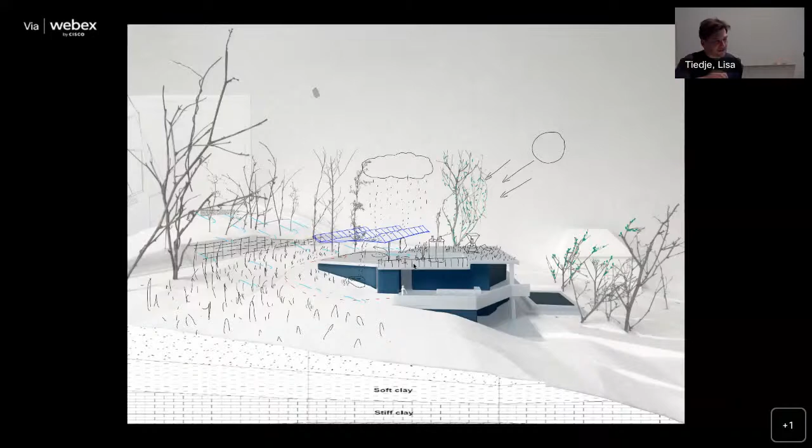And this became somehow the project. How can you build something where a lot is possible, but we don't have to decide today? So it became just a roof against the sun, against the rain, that will also recuperate some energy, and the garden, which is almost on the same level in the back as the roof, will somehow continue over the roof plane, and you would just create something very simple there, just a roof.

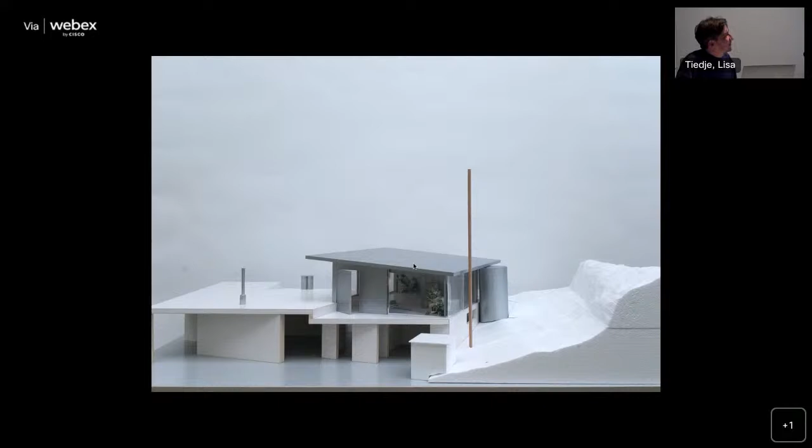So now we are here with them. It's in full development. This is from last week. And it's almost the cheapest, simplest structure we can build. And maybe we don't have to plan anything else for the moment. Maybe that's enough. And maybe they can just move in and see what they need. And if they need it, we do it.

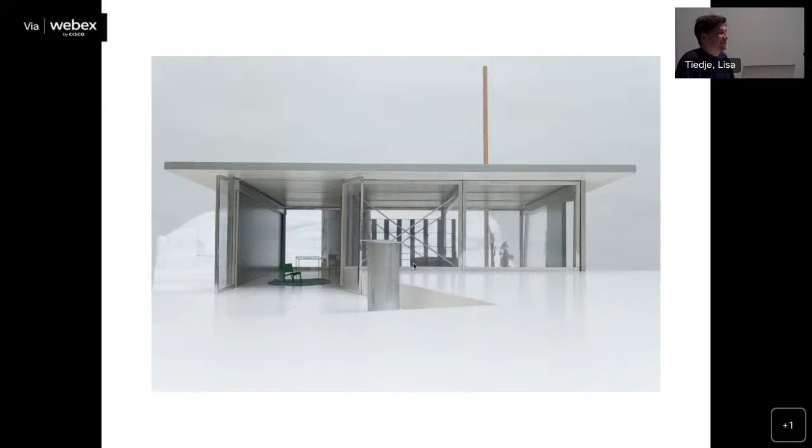So maybe we have to build a bathtub in the beginning. It's still a question. Maybe it has to be a toilet. Maybe you just have to prepare the pipes. We don't know yet. But maybe that's enough. And maybe we can just see if you live in there that it's really nice with not having walls. Maybe we need walls, and then we build walls in there, or maybe a cupboard can do.

And we can just keep on discovering this house, and this can develop with them together. And maybe over time we have to close off the staircase and it becomes an independent unit like the studio downstairs, and it becomes 3 houses that can be sold or rented out differently. Maybe it can be this, maybe it can even be more. Maybe it can become very dense. But this we will have to discover over time, how far it will bring us. So thank you very much.